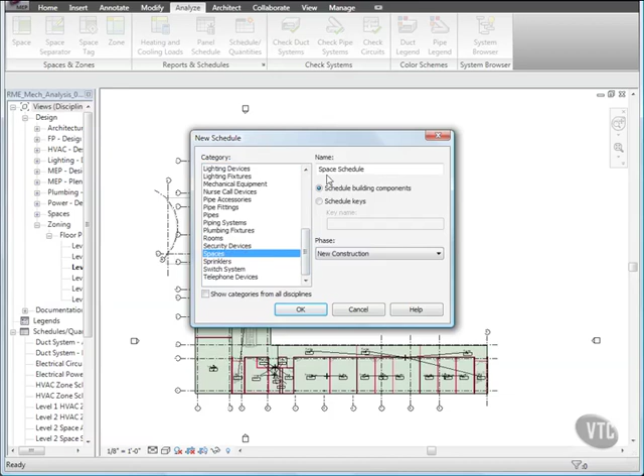Let's define the schedule. Click the Analyze tab, and from the Reports and Schedules panel, click Schedules Quantities. In the New Schedule dialog, under Category, select Spaces, and for Name, enter Space Airflow Schedule, and click OK.

In the Schedule Properties dialog, under Available Fields, double-click Level. When you do, it gets added to scheduled fields. Next, double-click Number, then Name, then Calculated Supply Airflow, then Actual Supply Airflow.

Then click Calculated Value, and let's define the airflow delta formula. For name, type airflow delta. For discipline, select HVAC. For type, select airflow. For formula, click Browse, and in the Fields dialog, select Calculated Supply Airflow and click OK.

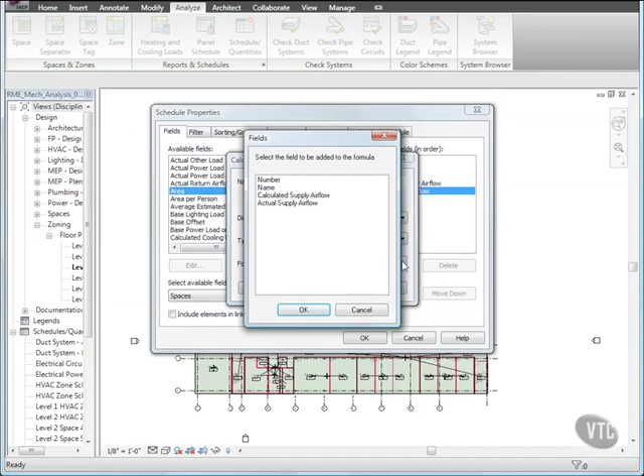Then add a minus sign after Calculated Supply Airflow and click Browse. Then select Actual Supply Airflow and click OK. Back in the Calculated Value dialog, click OK.

Back in the Schedule Properties dialog, notice that the calculated value, named Airflow Delta, displays under Scheduled Fields and will display as a column in the schedule.

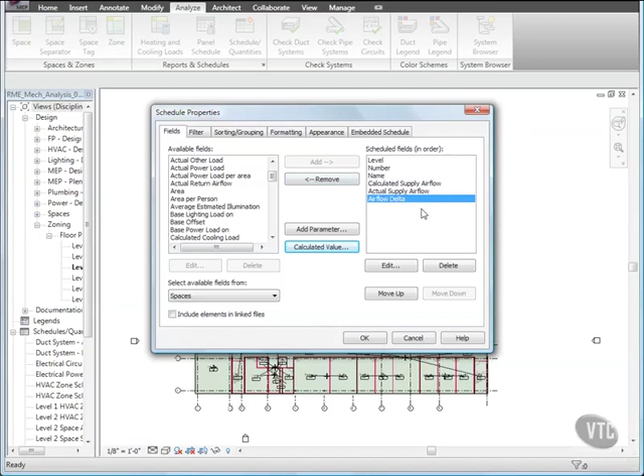Let's specify additional schedule properties. Click on the Sorting and Grouping tab, and for Sort By, select Level, and then select Header and Blank Line. For Then By, select Number, then click the Formatting tab.

Under Fields, with Level selected, click Hidden Field. Then select Airflow Delta and click Conditional Format.

We will format the Airflow Delta field to display as red when the difference between the calculated and actual airflow is outside an acceptable range.

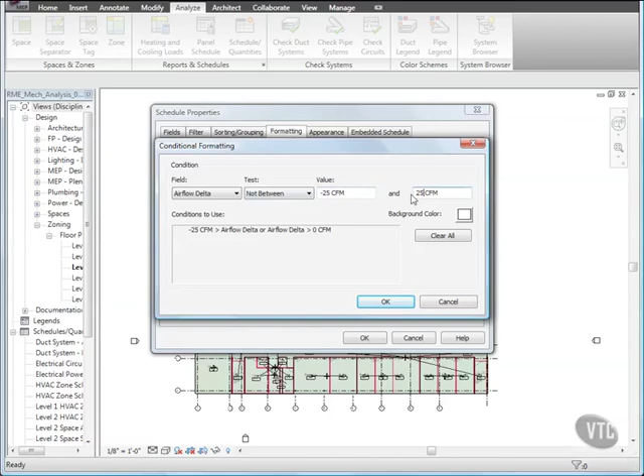In the Conditional Formatting dialog, for Test, select Not Between, and for Value, enter -25 and 25. Then, for background color, click the color swatch, and in the Color dialog, select Red and click OK.

Then, click OK twice. When the schedule displays, notice that because no air terminals have been placed in the model, all the actual supply airflow values are 0, and all airflow delta fields are red for occupiable spaces.

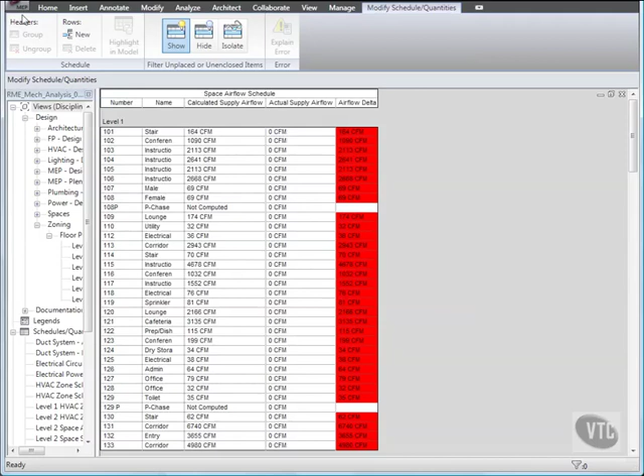Later on, you will use the airflow schedule when adding system components to satisfy the required airflow. Close the file without saving it, as the next lesson provides its own training file, and that concludes this lesson.